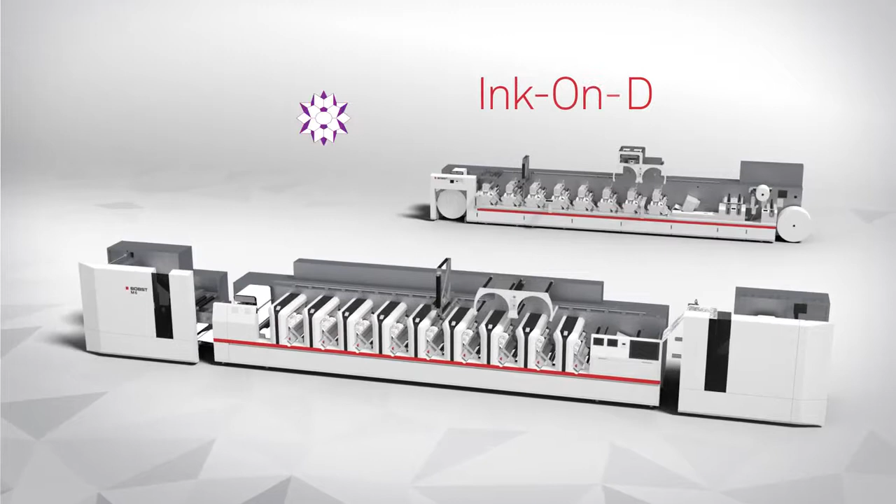BOBST is revolutionizing the flexographic printing process thanks to the new IOD system applicable to BOBST inline flexographic presses. IOD Ink-On-Demand simplifies and optimizes printing, minimizing waste and increasing the comfort for the operators.

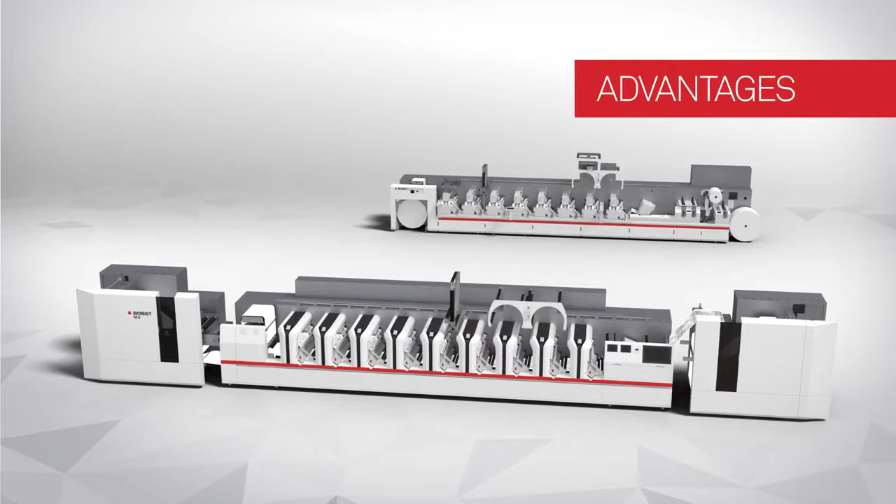The advantages of the new IOD system are: minimum amount of ink in the print unit, no ink contact with the hands of the operator, ink stability at high speed, automatic washing of printing components, independence from the operator's skills, fast training for the next generation of printers, and efficient and fast color matching.

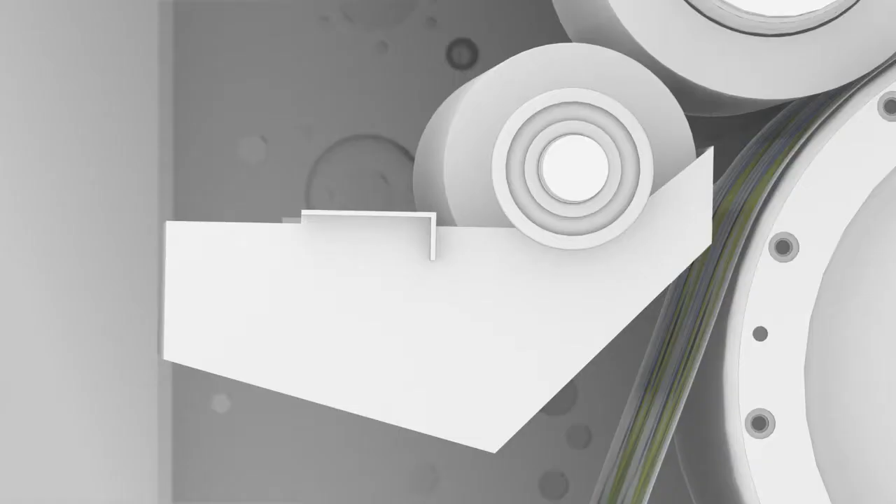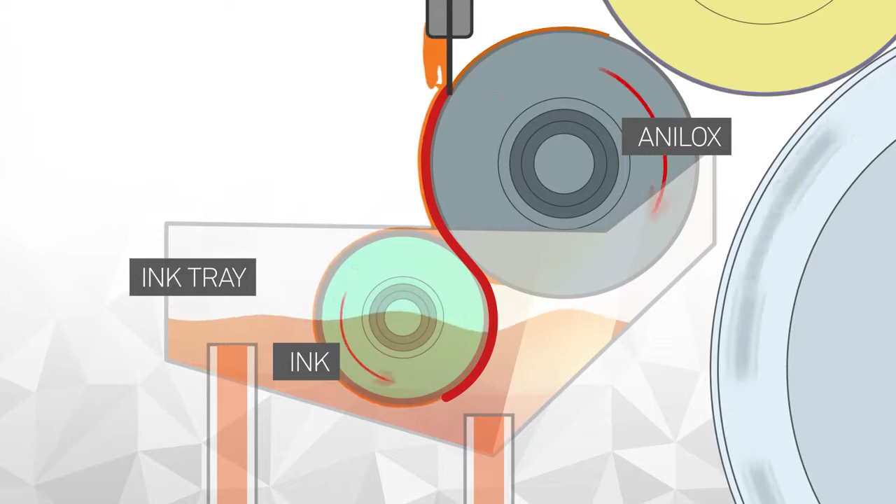Minimum quantity of ink. In the traditional method, the meter roller transfers the ink to the anilox, taking it directly from the ink tray. Only a minimal part of the ink is delivered to the printing roller and the substrate. The amount of ink used is greater than the actual need for printing, which is on average about 2 grams of ink per square meter.

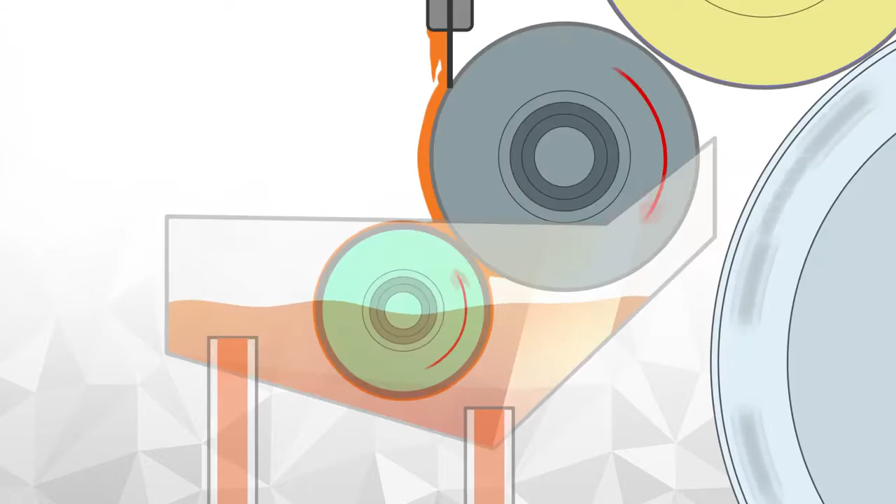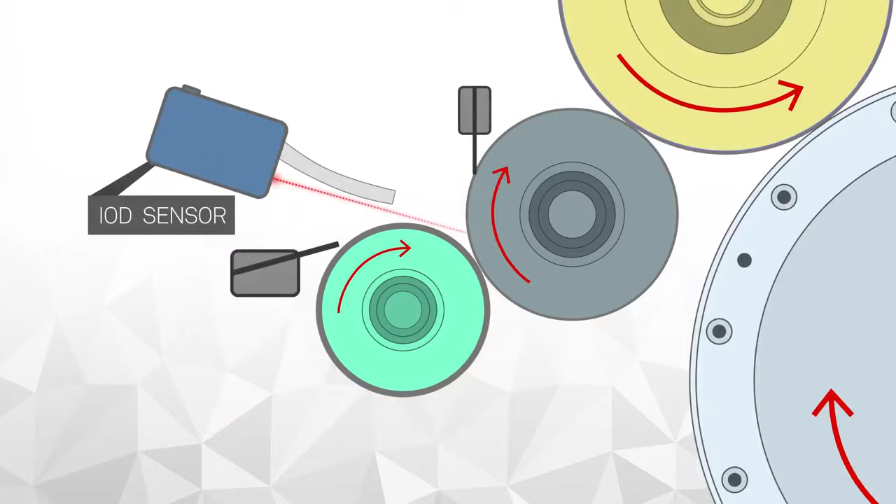BOBST revolutionizes the inking system, introducing the Ink-On-Demand technology. The IOD meter roller changes direction and turns in the same direction as the anilox. This creates the IOD ink gap to eliminate the ink tray and the ink return pipes, and dispense the color directly on top of the rubber roller.

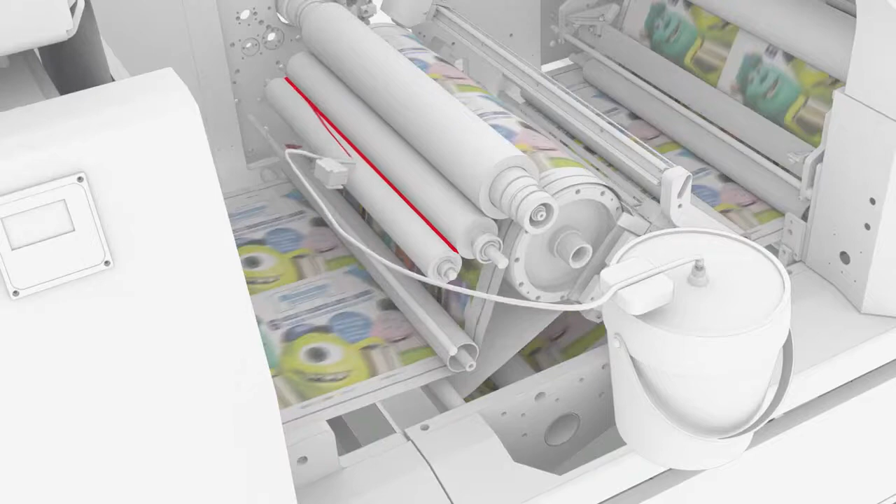Now the color comes in contact only with the surface necessary for printing, according to the exact need, thanks to a pump connected to the ink tank. The IOD ink gap stores less than 30 grams of ink.

To monitor the system, the IOD sensor detects the optimal ink level and keeps the correct amount of ink inside the ink gap. Thanks to the aquaplaning effect, the meter and the anilox cylinders do not come into direct contact, avoiding any wear over time.

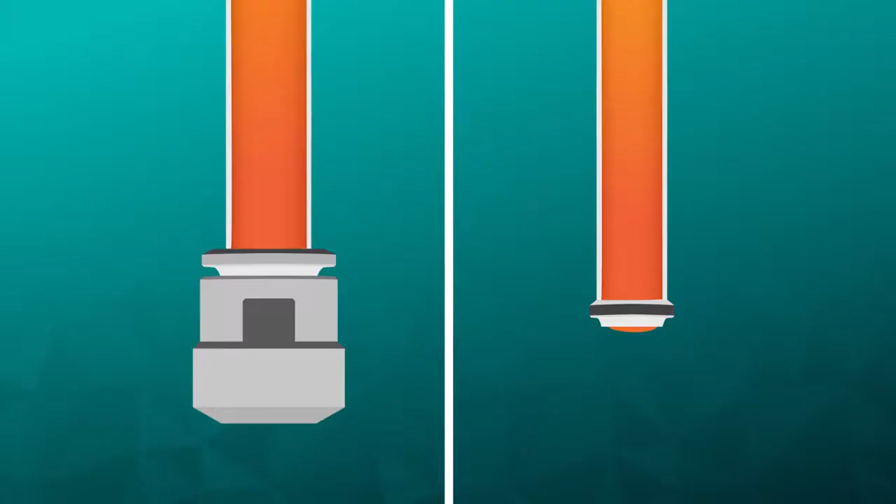Clean hands. Ink-On-Demand minimizes the contact between the operator's hands and the ink. A short rubber pipe, less than 1 meter long, is connected to the ink tank with special anti-drop blocks at its ends to prevent ink from leaking to the ground or touching the hands of the operator while being replaced.

The result? A comfortable and clean ink changeover, and by only changing one pipe, the ink change of an entire print unit is completed.

Ink stability at high speed. In the traditional printing method, when the meter roller rotates at very high speeds, the large quantity of ink in the system can create problems of ink leakage and small flying ink droplets.

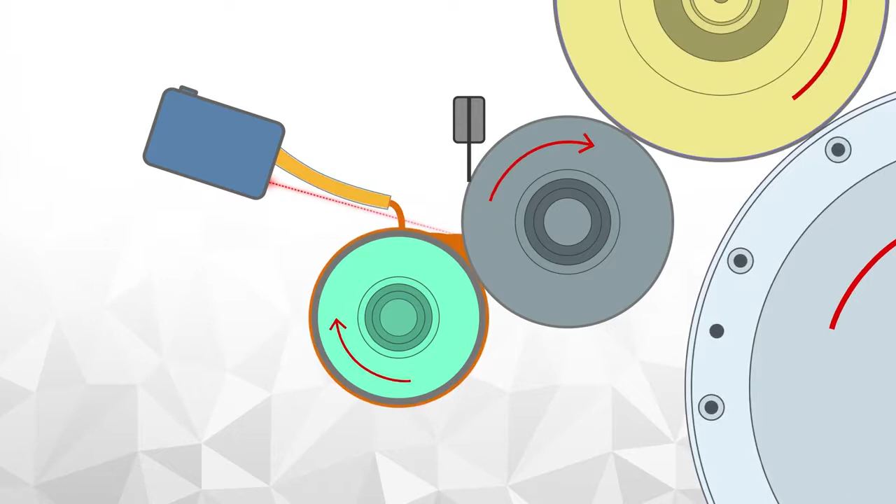With the IOD system, only 30 grams of ink circulate in the print unit, and the meter roller turns in the same direction as the anilox. This drastically reduces the amount of ink floating. Only a thin layer of ink is positively pushed back into the ink gap—a thin, consistent layer at low and high speeds, for the best print quality.

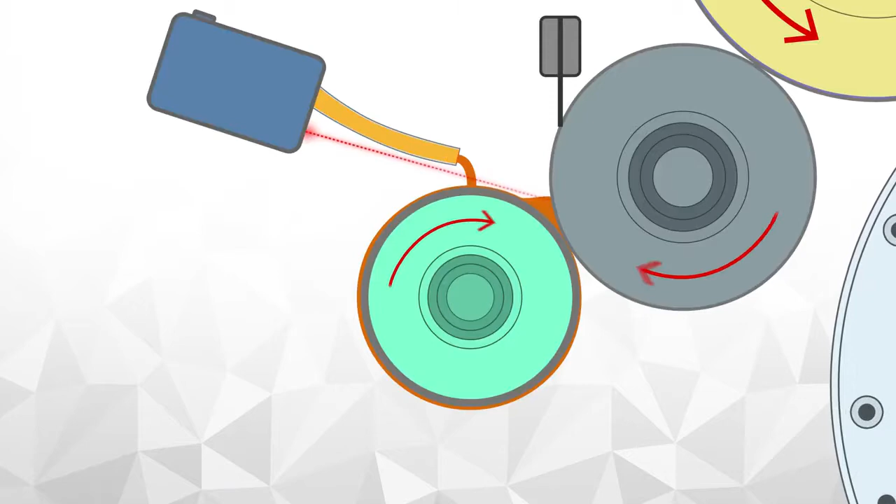Changing the rotation direction of the meter roller offers another benefit. The reverse direction of the meter roller forces the ink inside the anilox roller cells with high pressure, removing the air inside each cell, with the consequence of a perfect print quality, removing the ghosting effect.

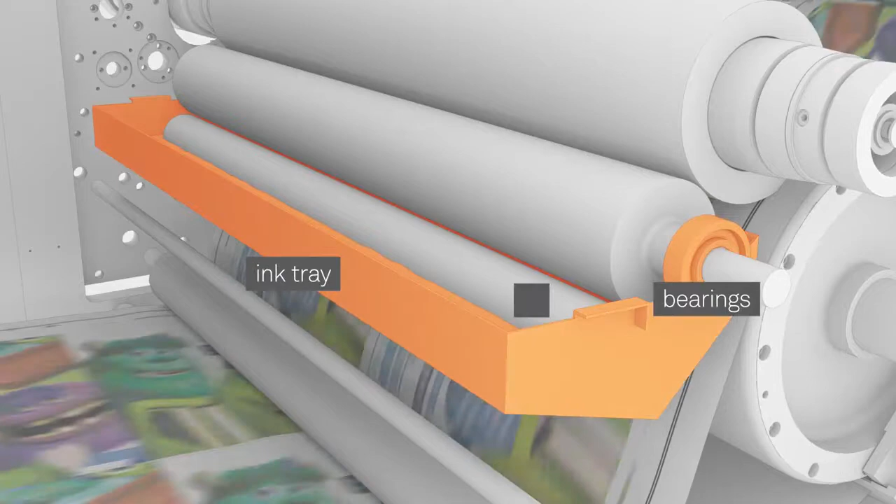Automatic washing. In the traditional system, at the end of the process, the bearings, ink tray, rubber roller and anilox roller must be cleaned one by one. With IOD, the cleaning of inking parts has never been so quick and easy.

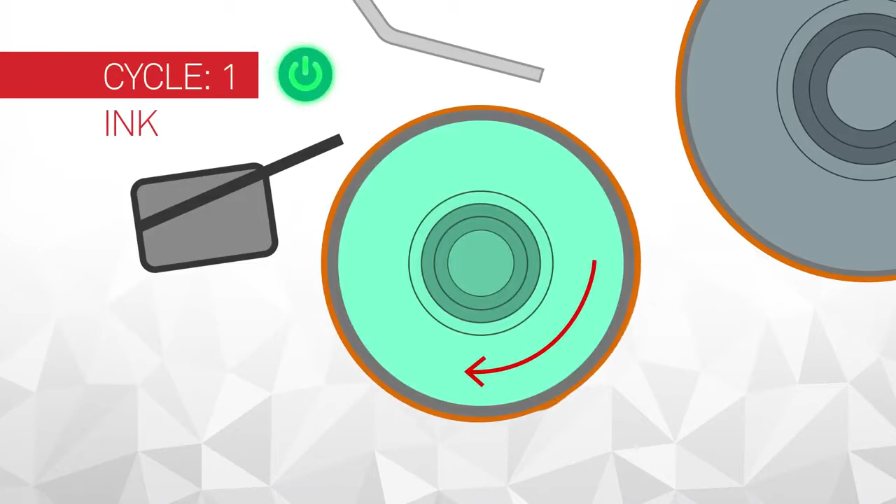3 automatic cycles take care of cleaning the rollers. The meter roller separates from the anilox. A special doctor blade rests on the meter roller and the ink is cleaned away.

Now the meter roller is reattached to the anilox while the washing liquid is inserted to clean the anilox and the meter roller. Again, the meter roller separates and returns to the doctor blade for further cleaning of dirty liquids. At this point, the last cleaning phase ensures that the last ink residues are eliminated.

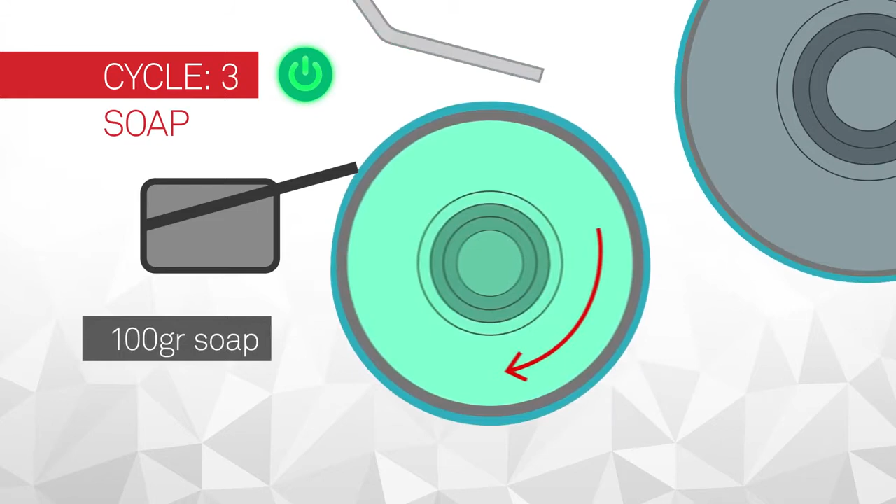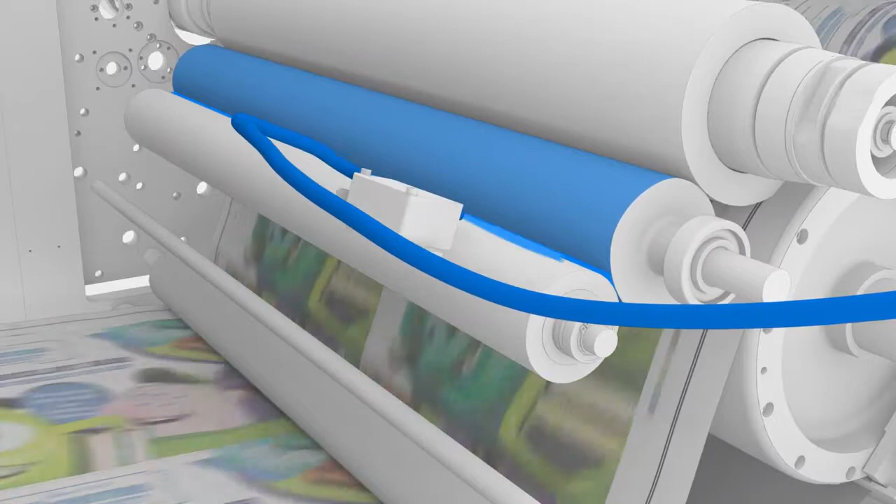At the end of the process, the rollers are perfectly clean, and the meter roller returns in contact with the anilox, ready to print a completely new color.

Fast color matching. Fast cleaning and only 30 grams of ink in the ink gap allow quick color matching pre-tests. As an example, 3 mini doses of 30 grams of ink with small differences in densities and hues could be used as pre-trials for color matching.

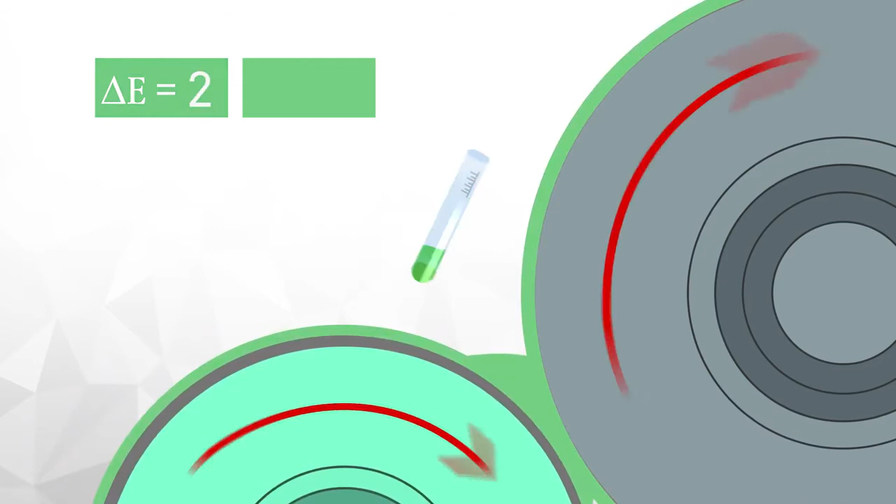With the Ink-On-Demand new inking system, color matching of PMS colors is performed in a few minutes, avoiding long machine stops with the minimum waste of ink, washing liquids, time and substrate.

BOBST, leading innovation.